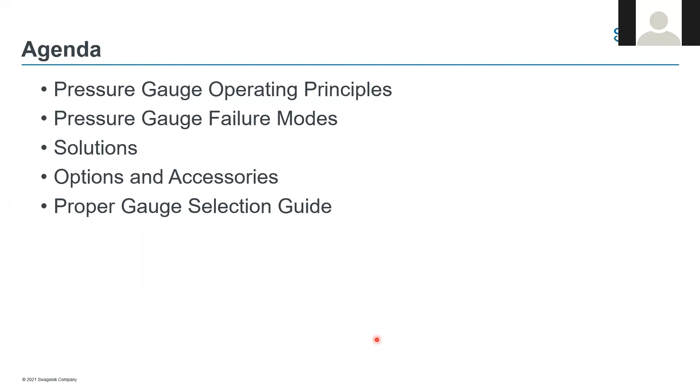So with that being said, we're going to go ahead and get started with the pressure gauge itself. The pressure gauge starts with this pressure connection, where you have a wide variety of different options to connect your pressure gauge to your system. Later on, we're going to talk about the Swagelok tube adapter and how that works with having an easy to align pressure gauge, but just know there's a lot of options, whether it's NPT, tube adapter, flange. There's just a lot of different ways to connect to your pressure. But that's where the action starts. We've got pressure coming in into the pressure gauge through our measuring element, what we call the Bourdon tube.

And I apologize for my shaky hand there. I've never been confused with a surgeon, so I did want to just show you where that pressure does come from.

It's in our measuring element, which we call a Bourdon Tube. That Bourdon Tube is made by using a Swagelok gauge with 316 stainless steel tubing, and it's formed into an oval shape, then bent into a C shape, and installed inside the pressure gauge, connected by the end piece with this pull rod.

This linkage connects that Bourdon Tube, where your system media and your pressure are, to this movement, which moves the pointer. So that's how you get your reading on the pressure gauge itself, through that measuring element called the Bourdon Tube.

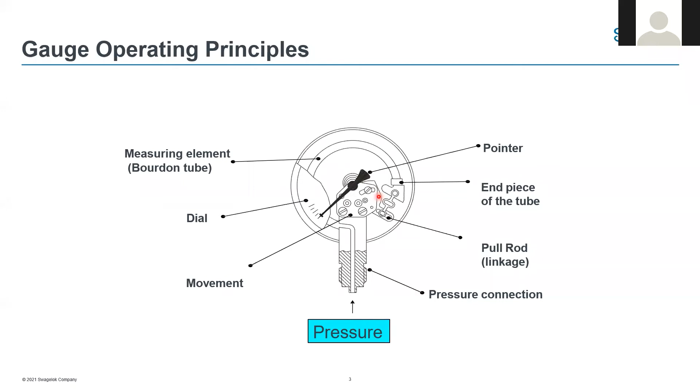So we're going to look a little more closely at the Bourdon Tube and why it's such an important piece of this pressure gauge. You can see on my pointer here, this is the cross section of a Bourdon Tube as it's flattened into that oval shape. On all of these images, when you see the dotted line, this is when pressure is introduced.

What that Bourdon Tube wants to do when it senses pressure is go back to its original round shape. It also wants to straighten out away from that C shape we have on this Bourdon Tube. So that gives us that movement and action to move that pointer.

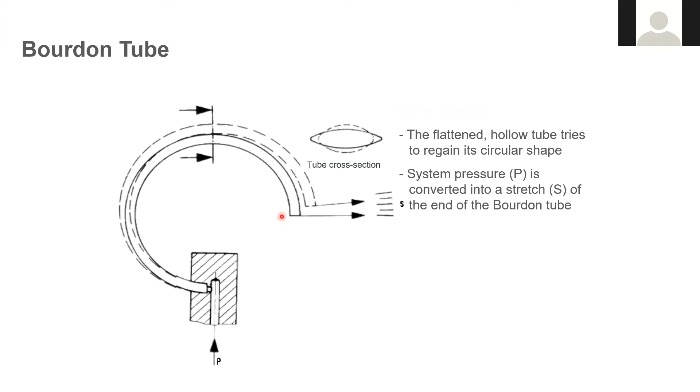And another closer look at the Bourdon Tube.

With our pressure gauges, you have a low pressure gauge, like a 0 to 10 PSI pressure gauge. That Bourdon Tube has been built with a very thin wall piece of stainless steel tubing. The higher pressures you go, looking at the 0 to 10,000 PSI or the 0 to 100,000 PSI range, obviously it's going to be a much thicker wall on that Bourdon Tube.

As we go into the failure modes and talk about what happens when these stop working, that's going to be really important to visualize and think about - this is the reason why this is failing - and that's how a Bourdon Tube is built. Hopefully that makes sense to everybody.

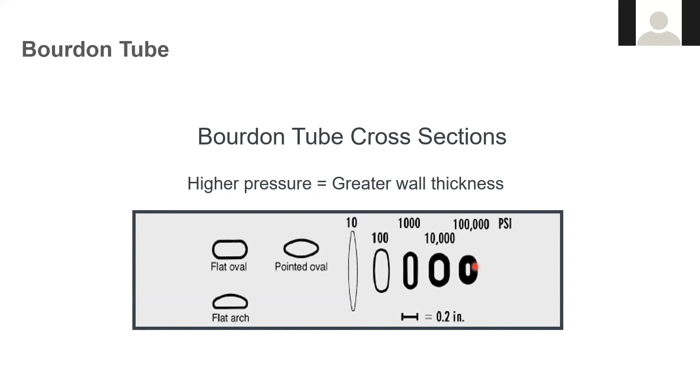That's one way to make a connection to the pressure gauge through that Bourdon Tube. Another way to do it is using a diaphragm seal. If you look at my image on the left, this top half of this image is just a standard Swagelok pressure gauge with a Bourdon Tube.

But what we've introduced here is a lower housing that contains a diaphragm. This lower housing containing that diaphragm allows us to create a barrier between the system media and the fluid that is in that Bourdon Tube. So as pressure is introduced into this lower housing, it's contained under the diaphragm, and that diaphragm is just moving slowly up and down, creating that pressure into that Bourdon Tube, and that's moving your pointer.

A little closer look on the right, you'll see the diaphragm and how that works and how that's designed. This isn't the last time we're going to see this diaphragm seal, but I want to take a minute to show you a different way to do it and how that might be an option or a solution if you have some gauge failures.

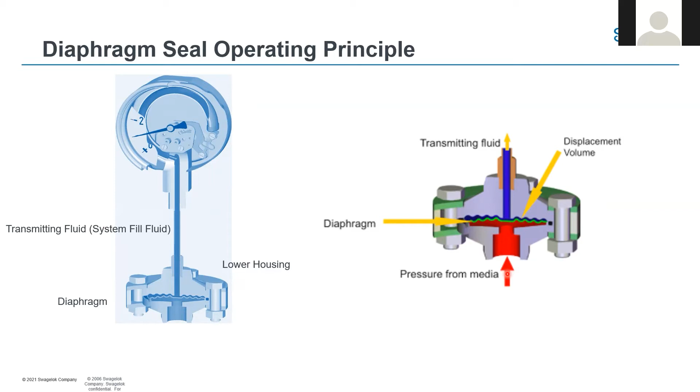Speaking of gauge failures, it's not often that we have a presentation where we're talking about how things don't work. So this is one of those rare instances where we're happy to show you why things don't work in an effort to avoid those in the future. Some of these pictures are going to be pretty surprising on how bad these gauges have failed.

But I do want to take a second here and open up the Q&A tab, because what I'd like to do from the group is get some guesses to our poll question. I'll read it to you: it's estimated that blank percent of installed pressure gauges have failed or are in the process of failing. So Dayton, if you could monitor the Q&A, and folks, if you could give us some estimates on what you are guessing.

Yeah, absolutely. All right, let's see, we got some. So we've got one in right now at 15%, okay, good guess. 20%, getting closer, 100%.

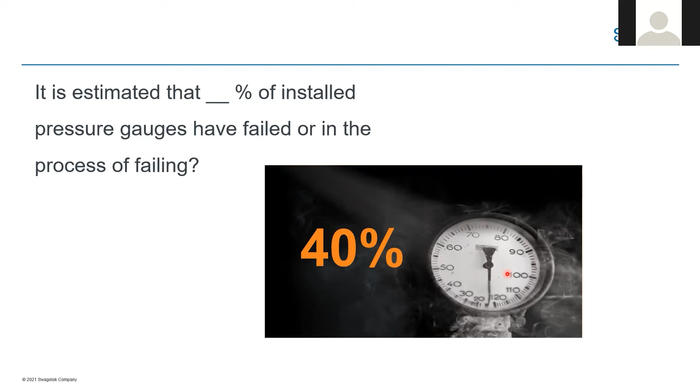That's why we're talking. I assume that's why most folks have signed up to spend these 30 to 45 minutes with us to talk about the failures and how to avoid them. So we have narrowed down these failures into 8 categories that they most often fall in line with. We're going to talk about pressure spikes, what that looks like, and how to avoid it.

Overpressure, mechanical vibration, pulsation, temperature is a big one. In my image here that shows a hot gauge or high temperature, but it could also be low temperature. So high and low temperature, that's something to consider. Corrosion and clogging can obviously lead to gauge failure. And then the last one we look at is mishandling and improper use. I would also put installation in that grouping, because a poorly installed gauge can absolutely fail. It'll either fail or give you false readings.

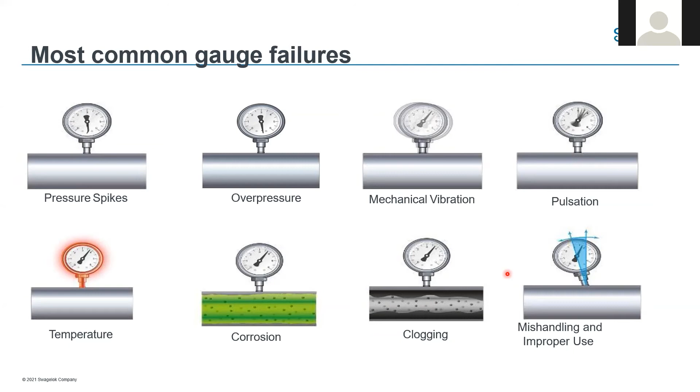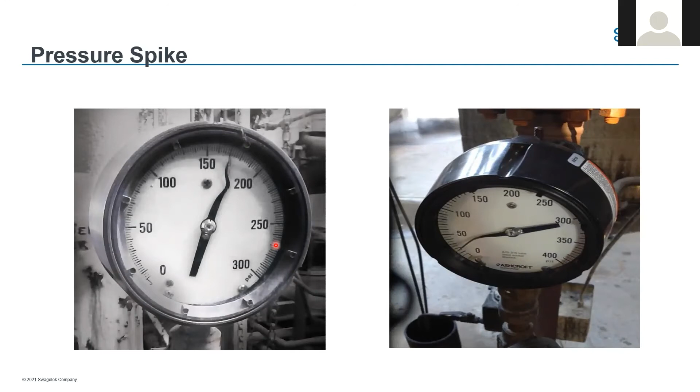So for a solution for a big pressure spike like this, what would be a possible solution? Well, the first one that comes to mind is liquid filling the gauge. As you can see, neither one of these is liquid filled. For liquid filling, you've got a couple options. You can use a glycerin, or you can use a silicone to fill the gauge. That filling not only lubricates all the moving, working parts in the gauge, but it acts to slow down the whole movement of it. So that pressure spike, it's likely never going to happen where that pointer comes around and hits the stop pin. It's just slowing everything down with the liquid filling.

So the next one we're going to look at is overpressurization. I'd like to open it back up to the group and have someone just give me a quick summary on what they think is going on here with this gauge. Feel free to let us know your diagnosis in the Q&A. Dayton, if you could let me know what you see as far as some guesses on what's happening here. Yeah, you got it.

Overpressurization. Very good. Yep. I guess I gave it away by putting overpressure on there, didn't I? Should have taken that off. Yeah, no regulator, which could very well be something as well. Yep.

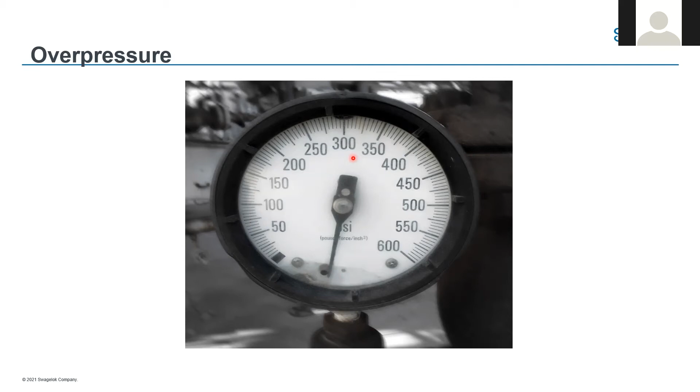But this is where you run the risk of using the wrong gauge, because at some point it's going to wear out. It's just not designed for this high of pressure. This particular gauge, ideally, would be sensing 300 PSI, not over 1,000. So our solution would be choosing the correct dial range and using the right gauge.

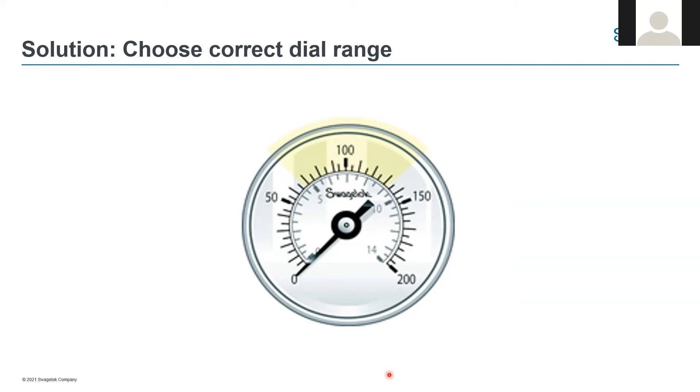A helpful rule of thumb: first, find out what your optimal operating pressure is in that line. For this slide, it's 100 PSI, that's my ideal range for that pressure to sense. So I would double that to 200 PSI, and specify, buy, and install a 0 to 200 PSI pressure gauge. Let me know if anyone has questions, but that's a good rule of thumb on how to use the right pressure gauge.

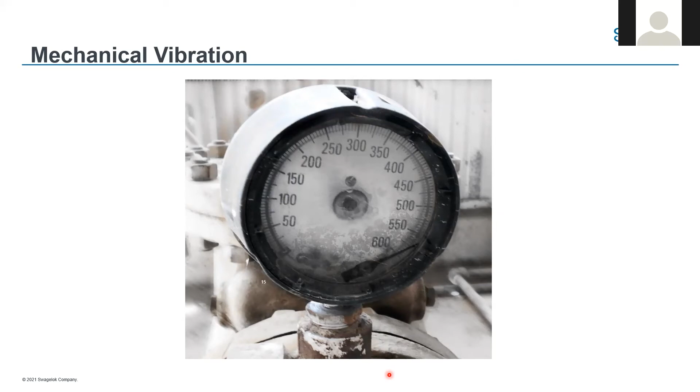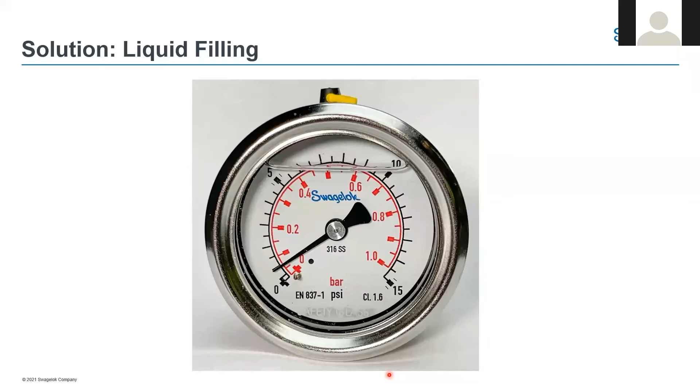One solution would be to move the pressure gauge away from the compressor, pump, or whatever's causing this huge amount of vibration. In the real world, is that always possible? No, it's not. So another solution would be to liquid fill that gauge, just to slow all that movement down instead of it rattling like crazy.

Next we're going to look at pulsation. And I can assure you that's not a hummingbird trapped inside that gauge case—that's the actual pointer wildly fluctuating between 100 and 200 PSI. So we've got some issues here.

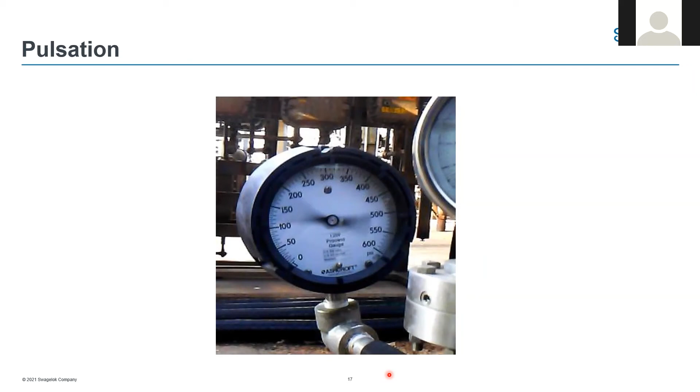Liquid filling it would certainly be an option, but we've got another option as well. You could install a snubber fitting, same theory as far as slowing that system media down into that bourdon tube, but this uses a filter element built into the snubber fitting that can easily be installed at your connection to the system.

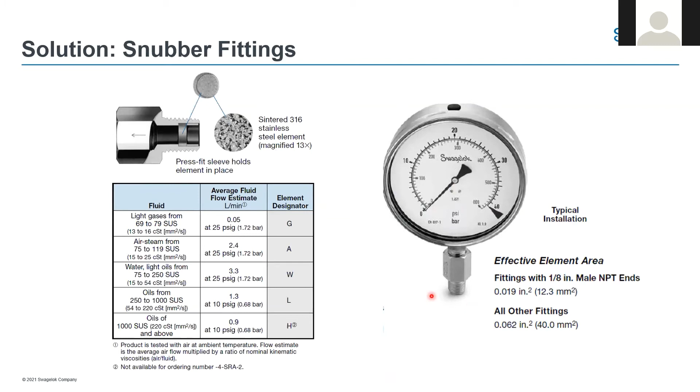One solution would be, quite frankly, to buy a better pressure gauge, one that uses 316 stainless steel components if it's compatible with that system media. Another solution would be to use our friend the diaphragm connection. That diaphragm seal creates a barrier, so that system media is never going to see the inside of that bourdon tube. That would be a solution for that corrosion issue.

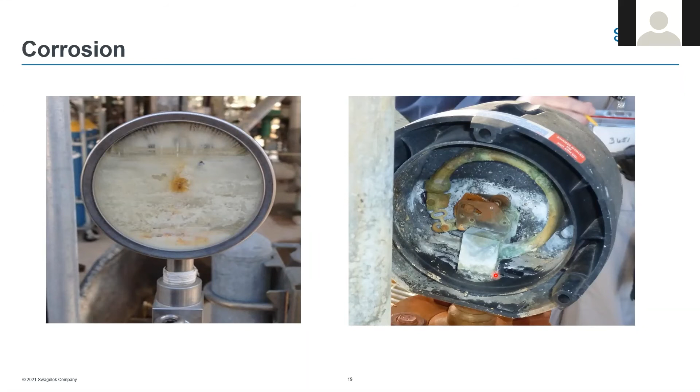Hey Dan, we have another great question from Mr. Joel Looper: what determines which type of liquid fill we need to use in a gauge? That's a good question, Joel. Temperature is a big one—we make a low temperature glycerin. So the first question I would ask is temperature. But thank you for asking, Joel. Somebody else was probably thinking that same thing, so thanks for asking.

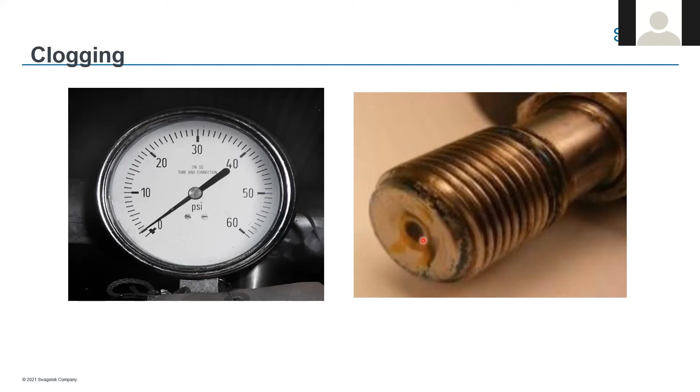So a solution to that would be to use our diaphragm seal again, just keeping that barrier between the Bourdon tube and the system media.

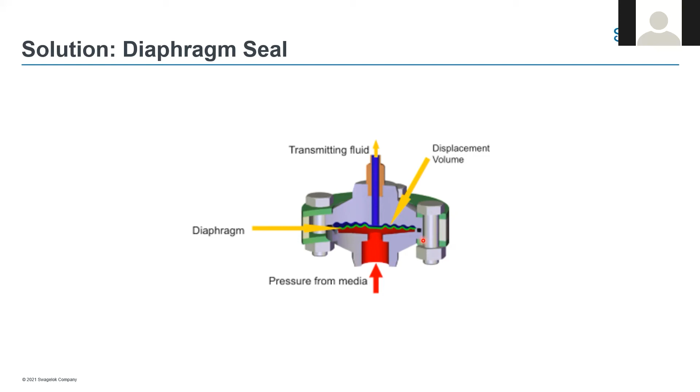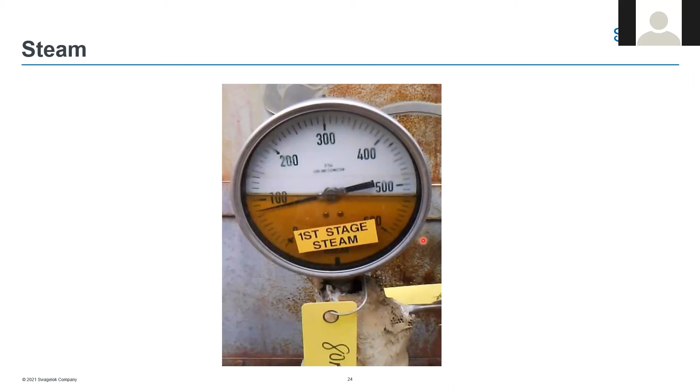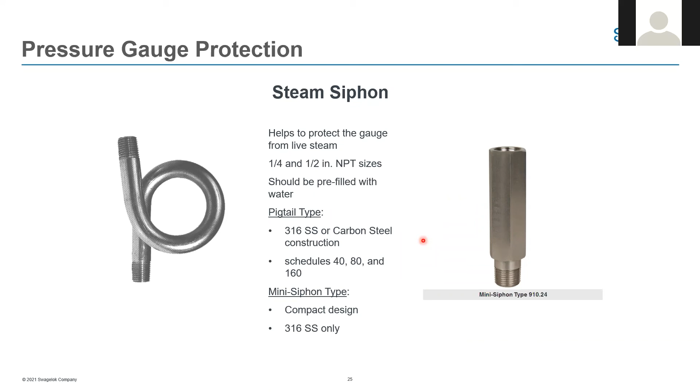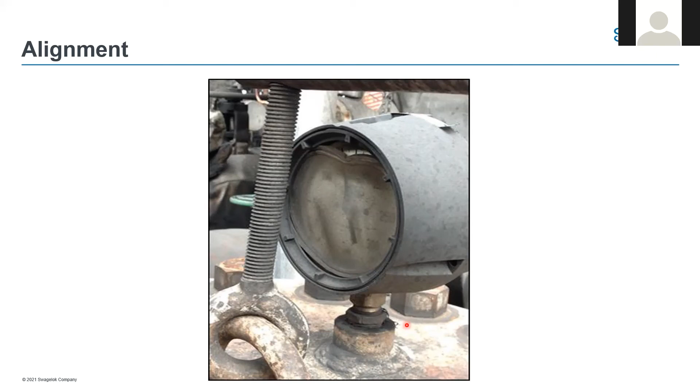But the alignment of that pressure gauge, it's behind a big eye bolt, I can see there's a piece of equipment above it. It just, to me, does not look like it's aligned so that an operator can easily see and monitor the pressure from that vessel. So what we would do in that situation is introduce a Swagelok tube adapter as the integral end connection. What this tube adapter does is eliminate any alignment problems. If you think about turning an NPT connected gauge into a port, you've got a pretty slim chance of that thing aligning just perfectly so that your operator can easily see it. With the tube adapter, you can just slide it into a Swagelok tube fitting and install it in 360 degrees, so you can get the exact alignment that you need.

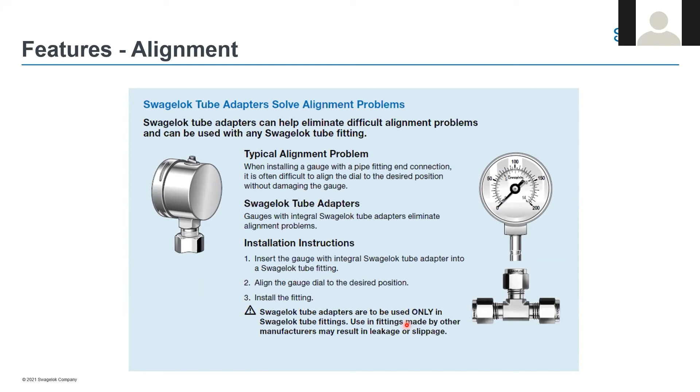There's no galling issues, reinstallation, using more or less tape, having it over or under tightened. There's a lot of things this eliminates just simply by using the Swagelok tube adapter.

One of the other things we offer as an option is custom dial faces. We can do different colors, add company logos, different scales. Basically any markings or artwork can be put onto a pressure gauge face. We have a really easy process to do that. We would work with you on the logo, get the colors right, we even add the Pantone numbers to make sure we get the exact color match. We provide a drawing and then agree on what that's going to look like before it goes to production. So we're eager to learn more if there's an opportunity for us to do custom faces.

And if you're like me, my vision is getting worse, not better, so we have some low light options. Typically, pressure gauges are in rafters, under equipment, in a dark boiler house, pretty hard to see them at times. So we do have some options on easier to read faces, that are easily read by flashlight with low light options. So we've got a lot of different options on making these gauges easier to read.

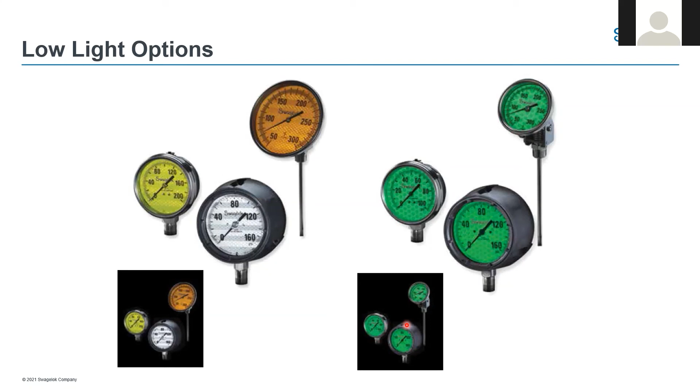Looking at the size to begin with, do you want a 1.5 inch or a 6 inch gauge or something in between? You need to figure out what the temperature is, and not just within the process, but the ambient temperature, the temperature in the room.

What kind of application am I putting this pressure gauge in? The A for application is the holistic approach of thinking about, okay, this is going outside, or I have potential vibration over here. I need to think those things through and carefully consider what options to use.